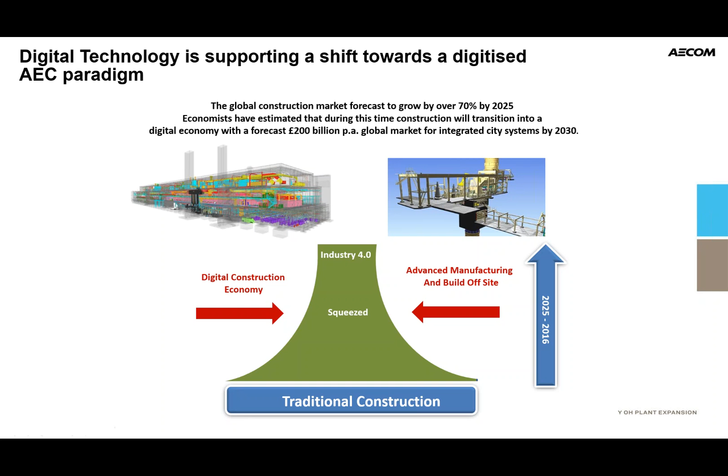What we're seeing as well, right across the world, is that there's now a European Union BIM task group trying to harmonise the national BIM efforts to bring a common European approach.

In terms of getting ready for BIM, we see this as really critical, trying to get everybody together and having very clear public drivers for change. That was one of the things in terms of getting the mandate in the UK, having a very clear why, and answering that why question was key. One of the key things in the investor report for the UK was making sure there's a very clear return on investment from an economic perspective.

What we're seeing in terms of public drivers is pressure for mandates, public budgets under pressure, meaning there has to be new efficiency and reform, and how BIM can help support that. We're seeing more and more critical need for intelligent infrastructure supported by good quality data. Increasingly, we're seeing environmental and energy demands and how we can use model simulation to improve on the embodied and in-service carbon agenda. At the same time, BIM is becoming a catalyst to stimulate innovation, and we're seeing mandates coming more and more, not just about BIM, but how it supports modern methods of construction, especially build off-site.

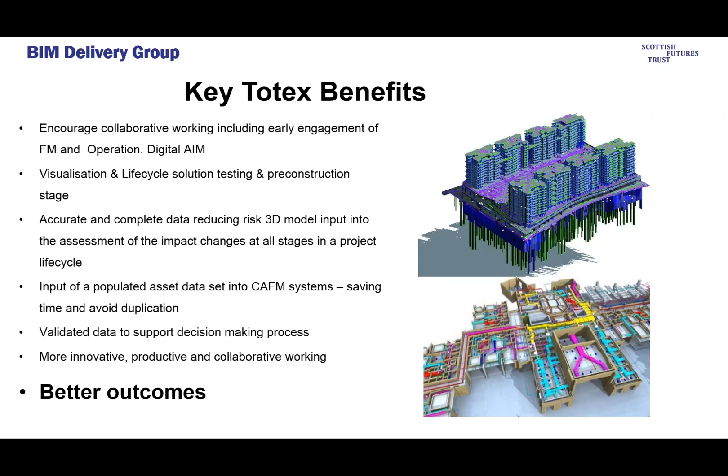Is the IFC mature enough? Should we be looking at other things just now? But ultimately, we're using our data to try and get better data to support a decision-making process, and it's about better outcomes - moving from output to an outcome focus for Scotland.

We see a real opportunity in the operational lifecycle, and unapologetically, it's a key thing we wish to focus on. We've seen many things - I'm sure many folk saw the Global Construction Review story where the mouse ate all the legacy drawings typically stored down in the basement. What we are seeing, and trying to encourage more and more, is a systems optimisation approach.

And there it sort of touches into level 3 and starts to think about telemetry within our systems as well. I'm sure many of you may have seen this before, but we found it very important as part of our policy to make sure our politicians really understood where the value was coming from - a very clear economic value proposition.

You can see there, in terms of level 2 BIM, we've got around 20% cost within delivery and 80% in operate. So we have to make sure we're focusing on both of these areas, but especially operations.

We need early FM engagement, because 80% of the whole life cost will be fixed in that first 20% of the early design process. So a key part of our targets was to make sure we're involving operation right at the very beginning of the briefing and design process.

We're aiming for as a target level 2 BIM in Scotland, where appropriate, and alternative procured projects. We're also thinking about that longer term shift to level 3, where we're thinking more about performance and operational data. As part of our policy, we're working with many government organisations across the globe, including Germany with the 4.0 programme, to make sure we future-proof our programme and think about longer term growth.

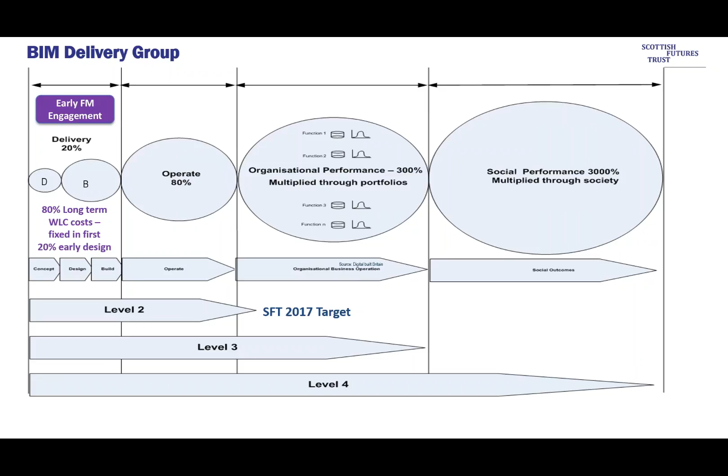This slide was very clear to our politicians to show the value proposition, both in terms of the savings, but also it became a good platform to show some of the social benefits as well. But we know the real magic happens when we think about that operational perspective.

This is a key thing in terms of making sure we had a strong implementation plan that would reflect any policy. And as you're doing in Canada, having a clear roadmap for procuring authorities to follow that's consistent and very much action-based.

This breaks down our implementation plan, and this may be your next stage in terms of your own roadmap. We broke it down into a series of what we're calling our horizons. We started with policy. We used the word mandate. We didn't know if it was going to be a mandate, and we'll talk about where we're going with that, but setting out clear objectives and giving the supply chain time to get ready.

Within Scotland, we had an ambitious programme around about 400 days. Whereas in HM government down south, it was closer to 1,500, so a very rapid time to put our policy in place.

We're mobilised, we've thought in terms of governance and working groups. We've also done research to make sure we've put lenses to see what's the best practice from other parts of the world as well.

We've spent a lot of time in education and training, and this is one of the big things that supported our policy. This week alone, we've finished training around about 500 public sector employees in Scotland. We've also got a series of Pathfinder projects that we're learning from, both in terms of new build, heritage projects, vertical and linear, to make sure what we are proposing for guidance fits very much within a Scottish vernacular.

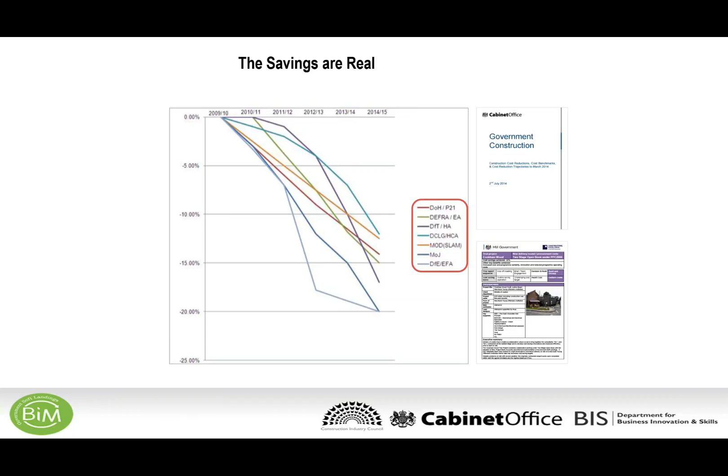We're also seeing it as well. This is a different opportunity as well. High Speed 2 - it's going to be the biggest project within Europe when it kicks off.

They're looking at their policy, making sure they can drive real value and having real vision. I think this is a big part. And again, we mentioned in terms of mandate, having clear communication. This is the vision in terms of High Speed 2.

It shows their digitization journey and some of the key milestones. Again, in terms of mandates, just having clear visuals that people understand. You can see on the right-hand side, the path without BIM - that world if we lived in analog, what did that mean?

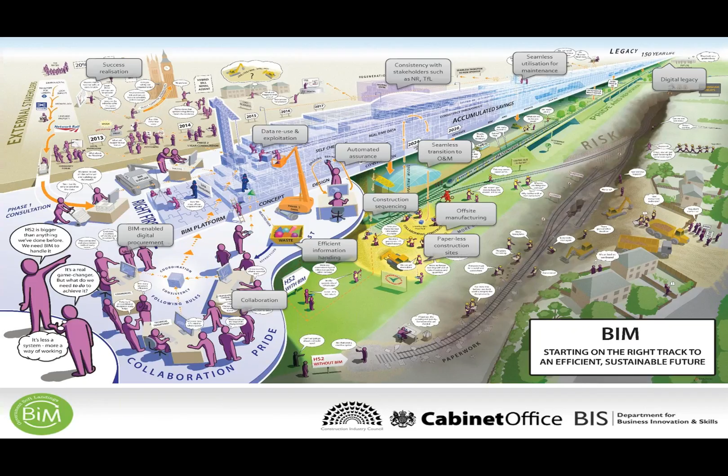It was a very clear picture that people clearly understood. If you look about halfway on the right-hand side, you see a little red devil, if you like, at the turnpike. For them it was also about behavioural change, and thinking about that within the strategies - a very clear way of showing what their policy was.

One of the key things, if you look back in terms of success of the UK BIM programme, was having very strong leadership from senior members of both politicians and industry leaders. Having them on side to get that mandate in place was especially key.

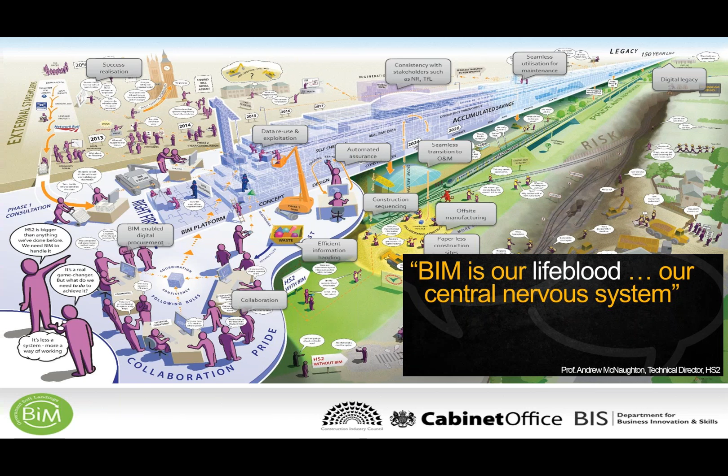Being able to think more and more in terms of focus, not just on the creation of data, but the whole asset information as part of the strategy is key. You can see there, in the context of High Speed 2, thinking very much about that digital railway, and right at the heart of it, the whole proposition of taking a digitised asset management strategy.

Really key right about it as well. Now interesting enough, in terms of High Speed 2, they have already banked £500 million of savings as part of their strategy. That was one of their key reasons as to why to do it in terms of their policy.

Again, they were very good, and I think this is a key part as well - we've done this in Scotland - trying to measure the value, having very clear benefits set out in terms of how that saving is going to be realised.

Again, also having a very clear timeline. You can see in terms of the UK, this is a key part of informing our mandate as well - a journey plan that shows a transition, moving from that world of, as we all know, from level 0 to level 1.

I think this is very key as well, getting that foundation right in terms of level 1 - think about common data environment and design management before we move to level 2 with all the parametric and information management. It was also really essential that we gave clear signposting to industry that it doesn't stop there.

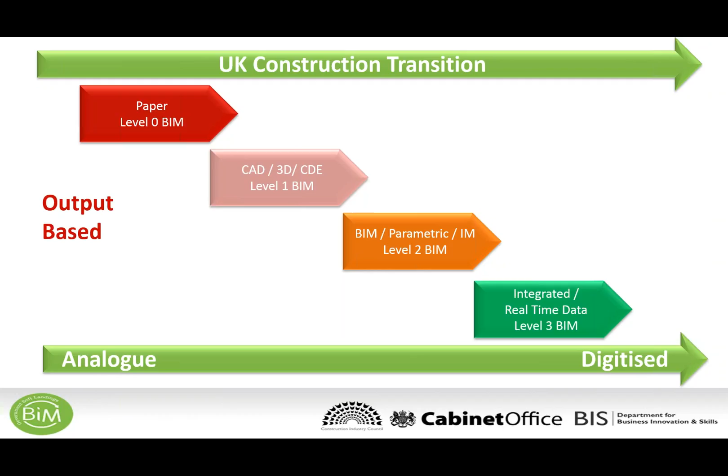We've got the longer term, the world with the holy grail of level 3 and that integrated real-time data exchanges. So again, having, as you're doing in Canada, a very clear roadmap backed up by our standards was very clear. But moving from output-based to outcome-based is going to be key.

And what we are seeing as we shift through it, we're being very clear in terms of measuring that process waste as well that's getting stripped out.

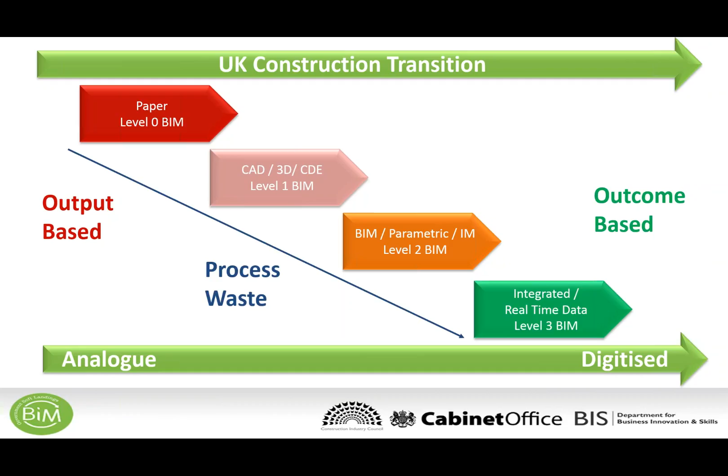So level 2 BIM, well, what does that look like? I think one of the things that really helped us with the mandate was thinking about having clear standards that sat behind it, making sure there was a very clear way of getting consent.

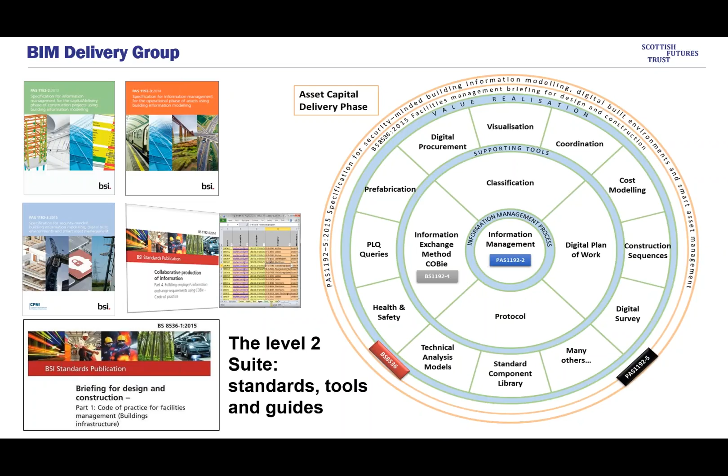Again, we talked about SMEs, making sure we actively engage them as well. We also built a network, what we call our BIM4 network, looking at all the different practices to make sure they were aware of the standards and help them put them in place. But as we came to April this year, we've now got 5 standards to underpin and ensure consistency of approach in both the asset delivery phase and operation. They're helping us make sure we've got consistency of approach and handover, and again they underpin that business case.

I think at the heart of it as well was the early publication of PAS 1192. I'm sure many of you may have seen it already, but thinking more and more again about information management. You may have seen this slide before, but as we came to, I think it's key to actually set out what does good look like at the end of the journey.

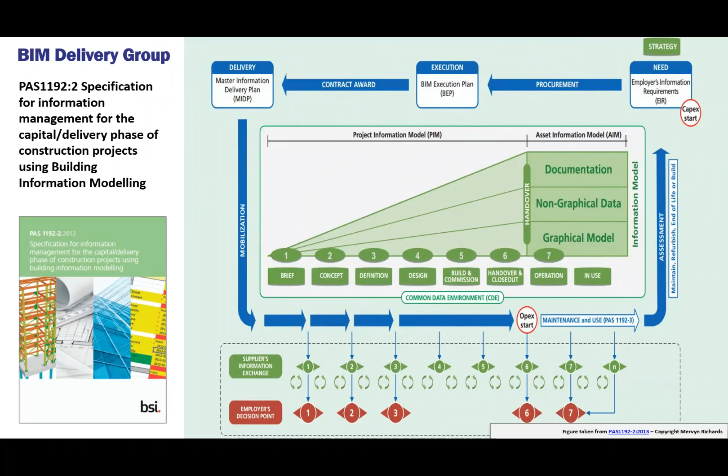And for us it was about an employer that is very consistent about putting good quality employer's information requirements out into the marketplace, making sure there's that assessment and need clearly articulated. A supply chain that's very good at responding with BIM execution plans. Again, one of the key documents for us was the Master Information Delivery Plan, making sure we can tangibly set out all the information needs.

A big part as well was the whole process map of that project lifecycle, making sure we can understand when information is required and being able to articulate the right amount of data. So clear standards underpin the mandate, making sure we could consistently move information through a whole project lifecycle.

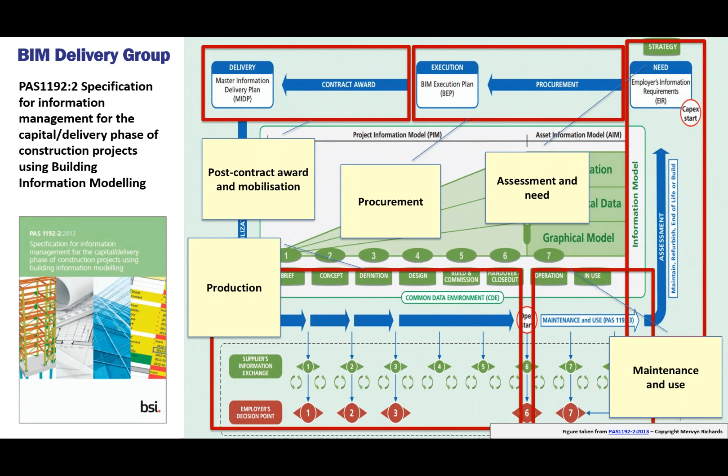So we spent a lot of time thinking about how we describe data, and one of the things that was built to support this was what was called the NBS BIM Toolkit, that digital plan of work to help describe and create a digital employer's information requirement, all key part of the journey plan.

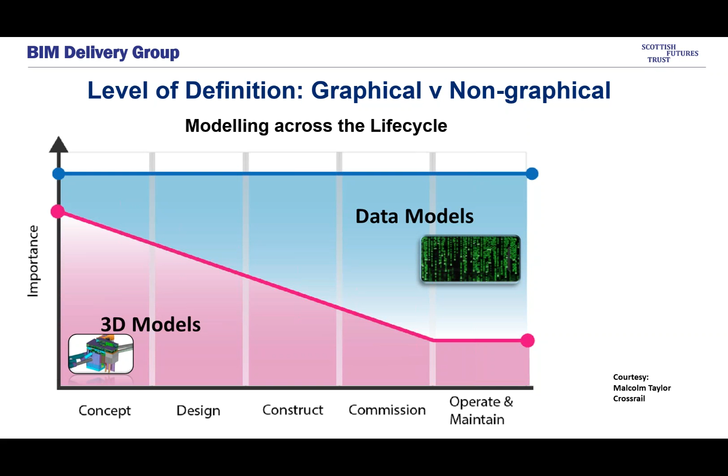Thinking about starting very much with the end in mind, thinking about that creation of that asset information model. And that was key in terms of the Scottish journey plan, was putting very much that spotlight, as we mentioned, on soft landings and their operational lifecycle, and how that's then procured through the capital expenditure stages. So thinking very much about operation as well to be key, and also fitting in with other documentation such as ISO.

One of the things that we've done as well, and this was an early sort of thing, this was pre our policy, was working out and trying to look at what the Scottish lifecycle looked like in key projects, what the typical information requirements were, and started thinking more and more about the information exchanges as well.

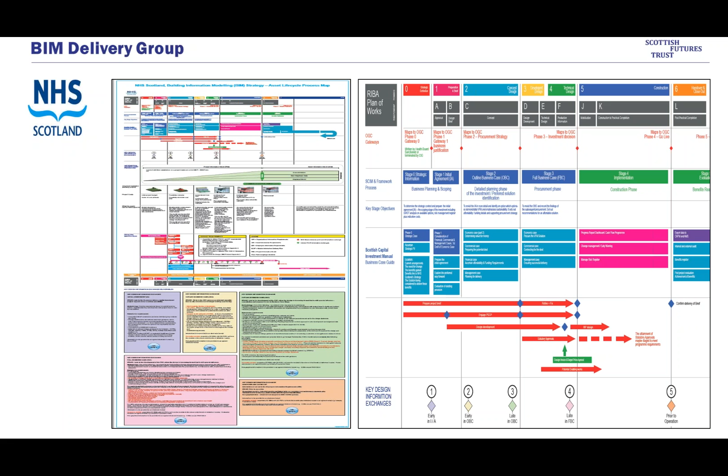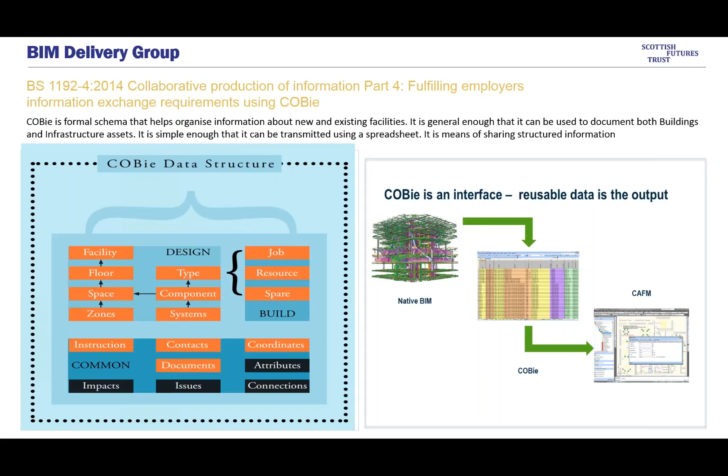So it also became a great way for us to think about data validation as well. It was a key part, and obviously a big part of our programme, both in Scotland and HM government, was very much thinking about open, shareable data standards. COBie has been very much key to the programme, and it's also helped stimulate lots of good innovation out there as well. So it's been a key part, making sure we've got good structured data. As we move towards level 3, it's sort of thinking more data-centric, and clients making a lot more time to think about their data schema right at the beginning of the project.

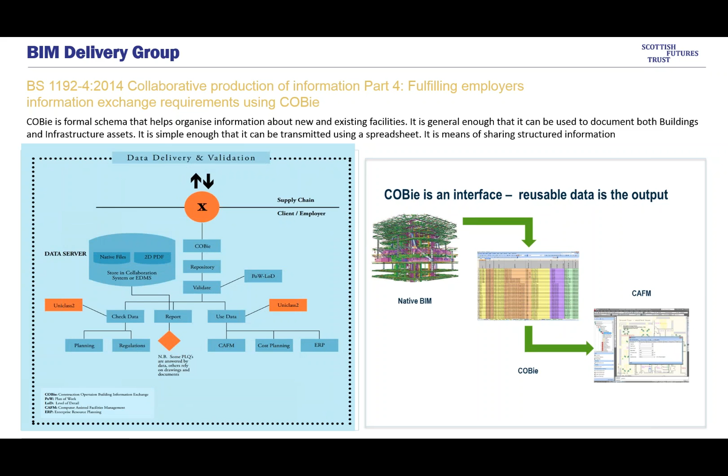One of the key things we mentioned in terms of the Scottish journey was putting again that focus on the whole soft landings process, and this is one of our key standards within here. Starting to think about how we brief right at the very beginning for better facilities management or operation.

One of the things we see as well is thinking more and more about actually giving our clients or customers the asset they want, making sure we don't drop the baton between key project stages. And whilst this can be uncoupled from BIM, BIM powers it, and this is a key part of both programmes in terms of Scotland and HM government.

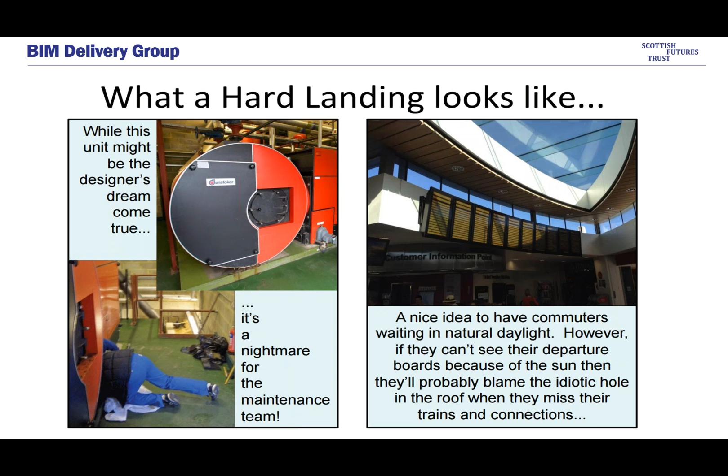A bit better in terms of a process, where we start off ensuring there's a soft landings champion, someone from operation that can bring past experience to the project. We have regular audits and reviews of the model to make sure it performs well from an operational perspective against the brief. We also make sure that we can use the model and the data for operational readiness and checking as well, and we use all that data to make sure we can start to get initial aftercare and fine tuning before moving into that post-op.

But you can start to think about future proofing as well. So we've now got, if you like, a concept of the digital built Britain. In the last budget it's being funded again, so we're starting to move away from collaboration to that world of integration, building a business plan.

It supports our longer term government commitments, and again, in terms of any mandate, I think it's really important to have clear, simple targets. Within our level 2 programme, the target was as simple as level 2 BIM by 2016 and make savings of between 15 to 20%. So clear targets as part of any mandate is essentially really key.

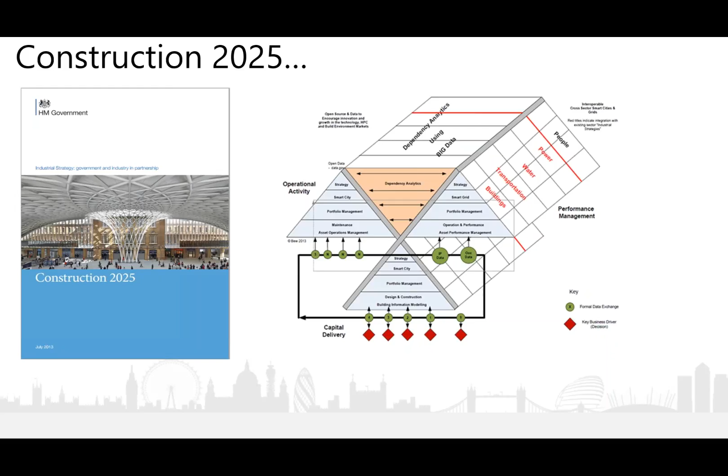One of the things that we did consider, again, as part of both programmes, is thinking about education, training, and the involvement of academia within programmes as well. Thinking about the upskilling requirements that are going to be required as part of the programme as well. So with both programmes, very good involvement and encouragement of academia and the formation of a BIM for Academia group to make sure we can involve all these communities.

So we're moving towards level 3, we're moving up the ramp, and I think that's what we are starting to see. It's a continuous journey, and again, I think that's been really important. And again, we're going through new challenges. Level 3 is not fully defined or briefed as yet, but you can start to see we're thinking more and more about performance, thinking about technology such as Internet of Things, more about interoperability and real-time data exchanges.

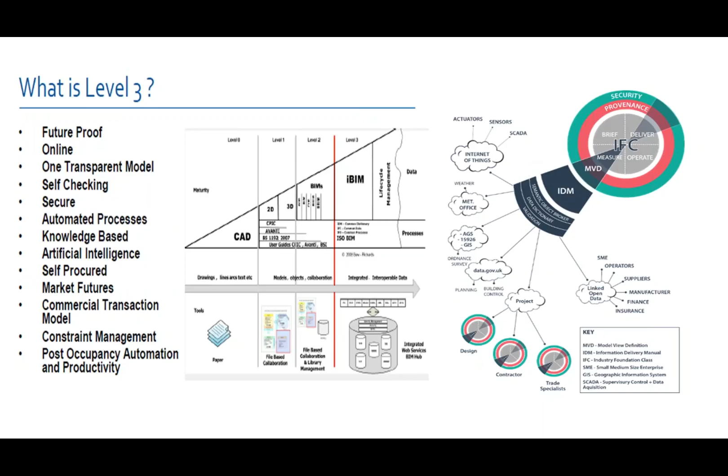And we've got some huge challenges as well, thinking about new forms of contract that will support this new digital way of working. You can start to see our transition in terms of a roadmap from a technical and commercial perspective. Level 3A starting to, if you like, becomes more and more also an optimized level 2. We're thinking more and more of a shift from COBie to IFC data exchanges.

At this moment, level 2 within the UK, we package things differently. We've got geometry packaged through the model, and our non-graphical detail packaged through COBie. So bringing that together to enhance improvements in level 2.

We move to level 3B, where we're thinking more and more, especially in infrastructure and geotechnical, in terms of the dictionaries and ontologies. We're also thinking commercially about the new forms of contract required operationally. We also think about developing new business models by level 3, and thinking more about the Internet of Things and telemetry, and the associated security around that, before we start to think about the whole world of semantic contracts and internationalization.

Well, what we're seeing, just to finalize, is more and more of that concept of giving our assets our brains as we move into level 3. We're hearing more and more about real-time data analytics, and seeing more about computer learning within there as well. So we're thinking about assets that are looking for that pulse check, that continuous refinement, but more and more about real-time data exchange. These are some of the key things we're starting to see.